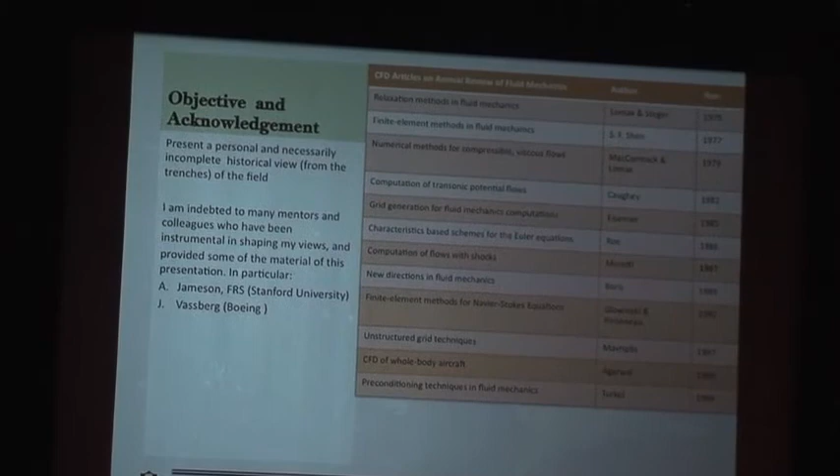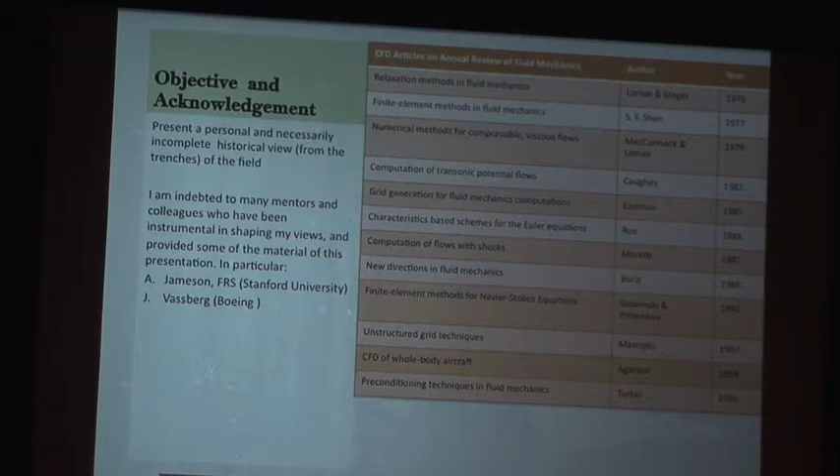So the only thing I can do today is present a personal and necessarily incomplete view of the field from my viewpoint, which for the past 20 years has always been more comfortable from the trenches of development than from the top. And of course, I'm indebted to many mentors and colleagues that have contributed to my development and provided some of the materials in this talk, in particular Anthony Jameson and John Vassberg, with whom I collaborated regularly in the past years.

So why do we talk about aerodynamics as a special field? Well, because the problem of aerodynamics is a little bit particular. The needs, like in other disciplines, depend on what you're looking for in your simulation. But as you well know, in aeronautics we can use a hierarchy of flow models and get some very useful information from simple scalar models such as the potential equation.

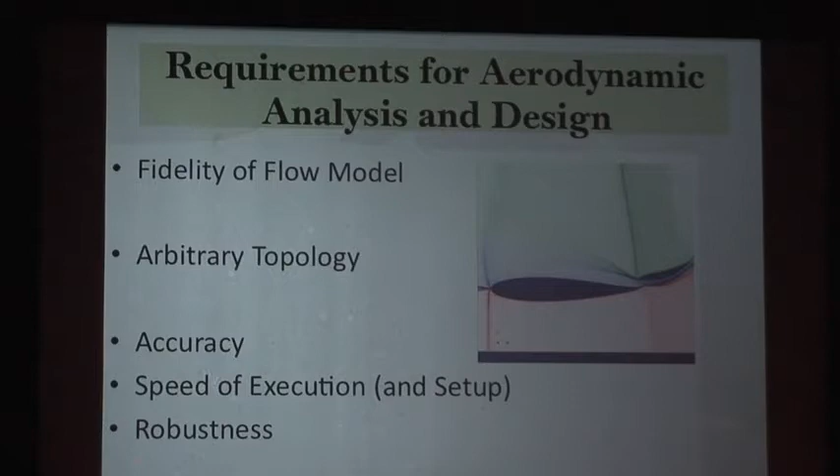And if it has to be useful in a design environment, you pay a lot of attention to speed of execution and setup times, which basically means how you set up the geometry meshing over this complex configuration. And you want to make sure that your implementation in software is robust in such a way that when you change parameters, you can anticipate in many respects what's going to happen. You don't want to have surprises.

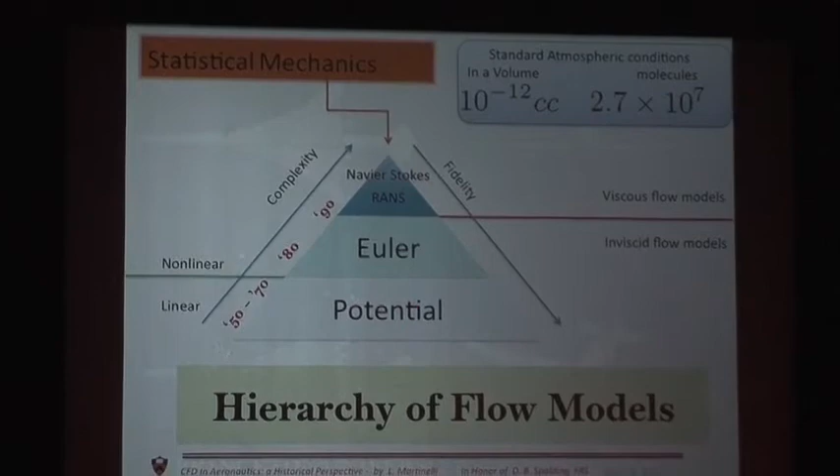So as I mentioned before, one of the things that distinguishes aerodynamics from other fields in CFD is the fact that we could actually get a lot of useful information from simplified linear or nonlinear models using the potential equation. And I put here on the left side of this pyramid roughly the decades that have been dealing with this particular mathematical model.

The beginning in the 50s and the 70s was all dedicated to trying to solve the potential equation, which by this morning's definition is not really CFD, but it was very useful in actually designing better airplanes. I personally would suggest that in this field we start traditional CFD when we deal with nonlinear problems. So the nonlinear potential equation, although it's a scalar equation, is a problem that cannot be solved by other means but numerical calculation.

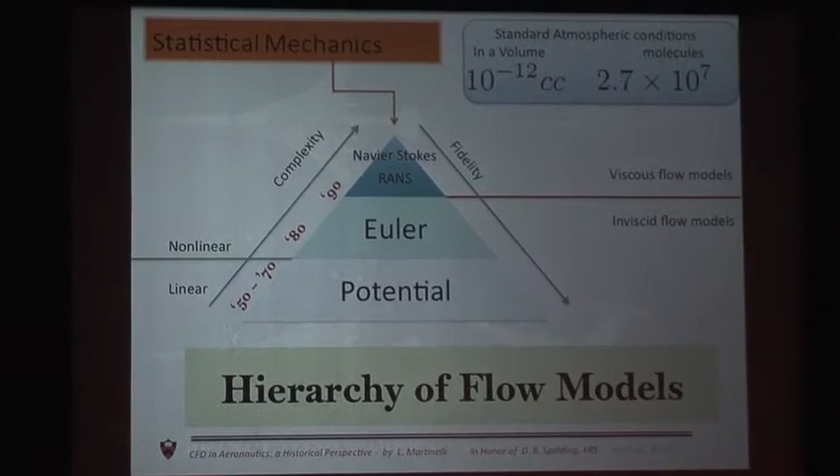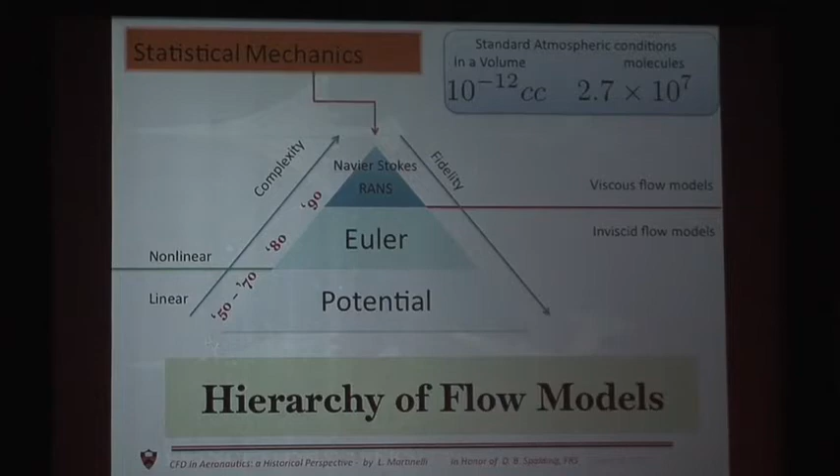So if you want to draw some initial points for truly CFD in this area, most probably the nonlinear potential equation, the full potential equation, is the place to put it. And in the 90s, and more recently with advanced computational methods, we are routinely now solving the Reynolds-Averaged Navier-Stokes equations over complete configurations.

And again, we are mostly concerned, as is well known, with three flow regimes, in which, if you look simply at the flow phenomenology and the characteristics of the potential equation, the potential is either elliptic, or mixed type in the transonic regime, or hyperbolic in the supersonic regime. So we are really interested potentially in developing numerical algorithms for all three possible kinds of PDEs.

So the first one, mentioned earlier this morning, is panel methods, which is a boundary method to solve basically the Laplace equation over complete configurations. It is interesting because it was actually developed mainly within industry. The first report by Hess and Smith at Douglas Aircraft is actually in 1962, and the effort by Paul Rubbert at Boeing started in 1964.

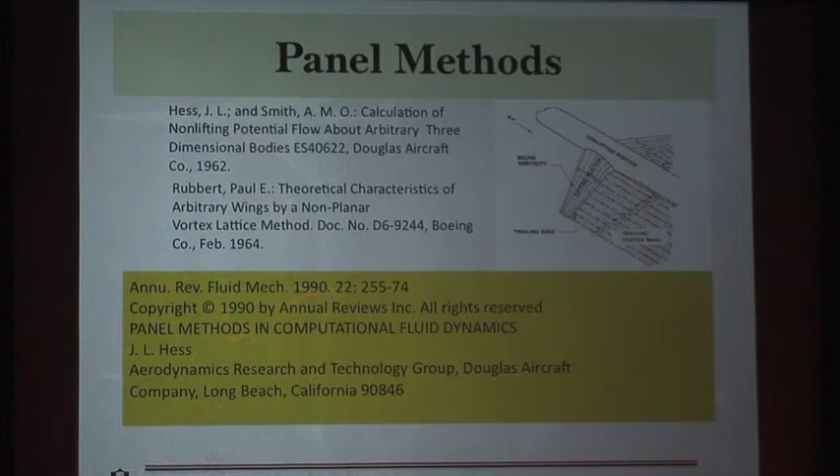And this is actually the internal report that described the first successful methods, at least in the United States, of solving the potential equation by using boundary methods. I'm not going to talk about panel methods, but I just want to point out that there is a very comprehensive and very well written review in the Annual Review of Fluid Mechanics by Hess in about 1990. So, sorry.

Really, I would say that for us, hardcore CFD was actually born with trying to solve the potential equation for flow in the transonic regime. That's what I call the transonic regime challenge, starting from 1956. It is well known that transonic flows are of interest, because that's where you want to cruise most efficiently, and also that's where even a supersonic jet will maneuver.

You know that from a mathematical point of view, they're very, very tough indeed, and if there are shock-free solutions, they're actually isolated points. What does it mean? It means that even if you can find a solution that has no shocks in the transonic regime, a supercritical airfoil if you like, then every single perturbation, either in the geometry or in the flow field characteristics, will move you away from that shock-free solution. That's a theorem that Cathleen Morawetz proved in '56, and it highlights the challenges and difficulties of this particular regime.

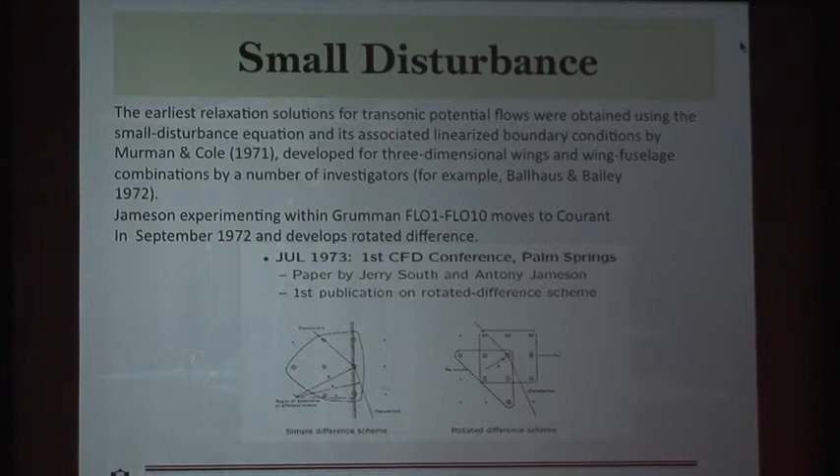The first attempts were actually in the early 70s, and the main actors were Earll Murman and Julian Cole, who in January 1970, at the AIAA meeting in New York City, presented the first really viable solution of the small disturbance equation in transonic flows with the associated linearized boundary condition. And there was also a paper by Yoshihara at the same meeting, and that's basically what caught the interest of industry in CFD at that level.

And at the same time, Tony was back then in Grumman, and after being excited about what he had seen in the meeting in New York, he started coding his own methods, most probably on his own time. And really the first results that solved one of the major problems of the mixed type, so basically having the right region of influence for your numerical schemes, was published in 1973 at the first CFD conference

in Palm Springs, in a paper by Jerry South and Tony that is actually the first publication of the rotated difference schemes. The difference schemes allow you to upwind automatically in the supersonic region and maintain the proper region of influence in the subsonic part. So at the beginning of the 70s that problem was solved, but people were convinced, rightfully so, that they needed to move to solve the full potential equation.

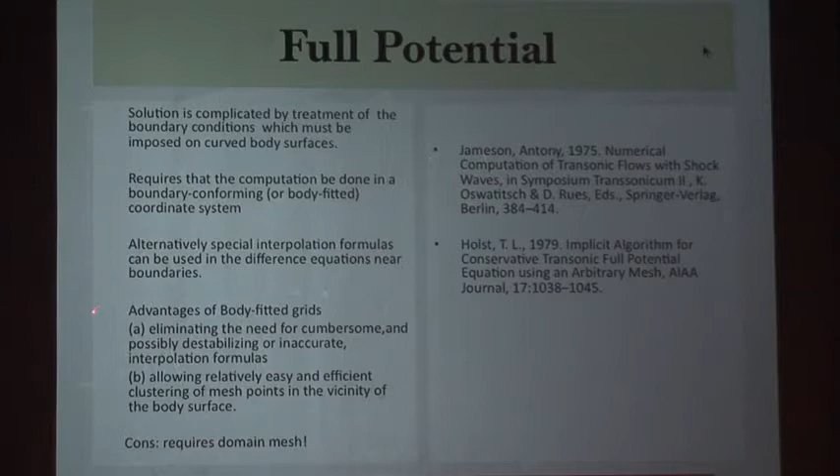And the full potential equation is the full nonlinear isentropic picture of the flow. In that flow regime, the solution is complicated by the fact that the boundary condition cannot be linearized anymore, and therefore it needs to be enforced on the curved boundary. And remember what I said before: the boundary has to be represented fairly accurately, because the flow solution is going to be extremely sensitive to the accuracy of the boundary itself. And so that basically forced, or encouraged, the use of body-fitted grids for the first time.

The other alternative would have been using interpolation formulas, but the field went on using body-fitted grids, which eliminate the need for destabilizing interpolation formulas. The cons: they require a domain mesh. And so the entire field of gridding, of developing body-fitted coordinates in 3D, opened up as a result of that. But for simple geometry, such as a three-dimensional wing, you can use conformal mapping and generate a very good quasi-orthogonal grid that will do the job without being too involved with the mesh generation.

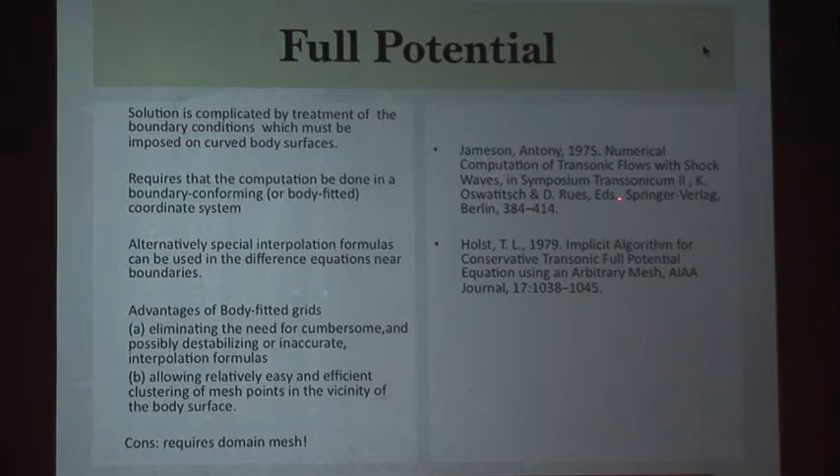And for the full potential equation, the two publications that really stand out are, in the second Transonic symposium, which I think was not in Berlin but in Göttingen, Tony's paper on his approach to full potential. And for implicit algorithms, Terry Holst has a very good and influential paper a little bit later in 1979.

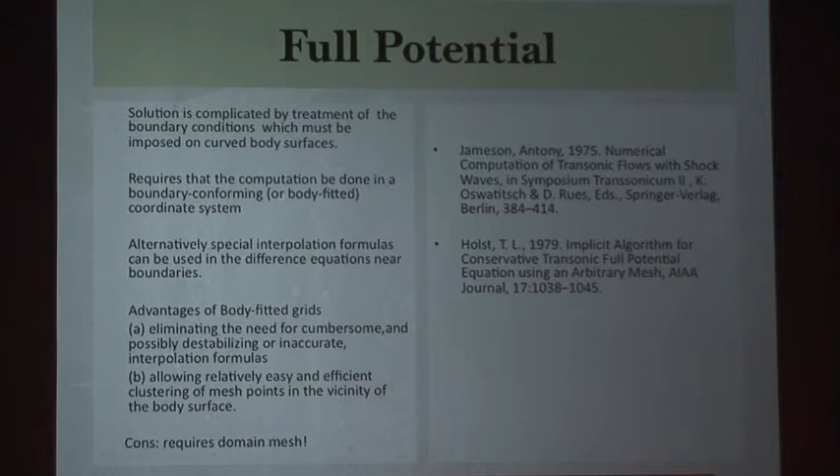So let me talk a little bit more about what has been a game changer in the field, and that's the computer code that implements the 1975 algorithms. It was really a game changer because it demonstrated, as we will see in a second, that computational fluid dynamics was a useful tool in airplane design.

I'm not going to go through these tidbits on how FLO22 came to be, but the important point is that coding started in about 1974, and it sat in boxes in Tony's office for a few months, and back then there were boxes of cards. For those of you that are young, most probably you've never seen that. They were physical ASCII cards, painfully typed on one of these punchers, and whenever you gave the box of cards to the operator, you almost had a heart attack because sometimes they would be jammed in the machine and you had to start all over again. So that was the computing back then.

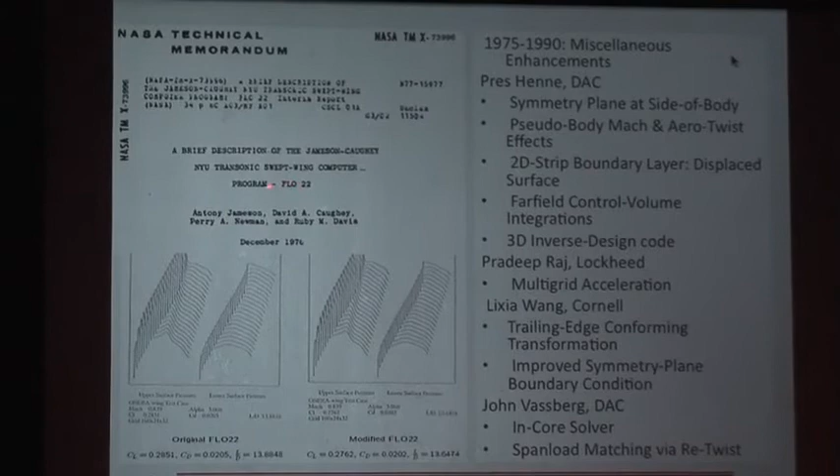These two boxes of cards sat in Tony's office for a while until David Caughey of Cornell came into the picture. Back then Caughey was at Douglas Aircraft. After he moved to Cornell, he got a copy of FLO22 and had it running on the Cornell machine in a couple of weeks. David is a very good programmer. And that changed the game, because the program was published and went around the world in this 1976 NASA report.

And it produces, basically, this typical pressure distribution on a wing, including a weak shock. This is the lambda shock on the top surface. This is the bottom surface, over a three-dimensional wing. As you can see, there were a few bugs at the beginning in the 76 paper, but when all these little bugs were worked out, the pressure distribution was not that different, and the CL prediction and the CD prediction were agreeing within about 1% of each other.

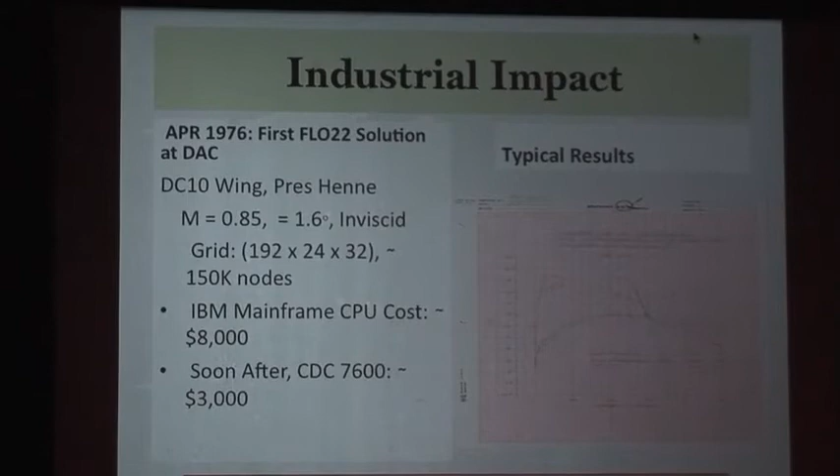But a lot of people in the industry contributed to the development of FLO22. From 75 to 90, there were enhancements at Douglas Aircraft by Pres Henne, Pradeep Raj; Lockheed added the multigrid acceleration. At Cornell, they improved the transformation at the trailing edge, and that is reflected in this better pressure distribution right there. And John at Douglas Aircraft implemented the in-core solver. So it had a real industrial impact.

In April '76, they were the first FLO22 solution at Douglas Aircraft on the DC-10 wing. This is the amount of plotting, automatic plotting, that was available back then. And this one was the pressure distribution, the continuous line from experimental data, and this one was actually the prediction of FLO22.

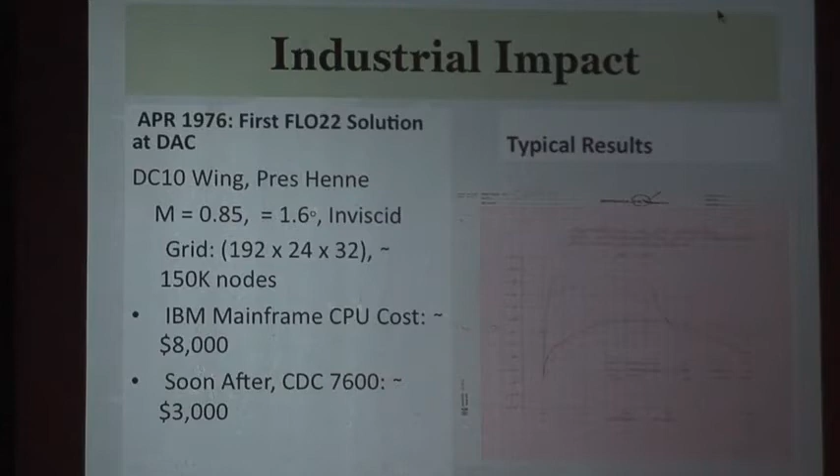And the result was clearly an inviscid potential obtained on a fairly fine mesh, about 150,000 nodes. And the computational cost for one calculation of this type on the IBM mainframe was about $8,000, and soon after was $3,000, which was peanuts with respect to what the impact was on the Douglas development back then. And it's still used.

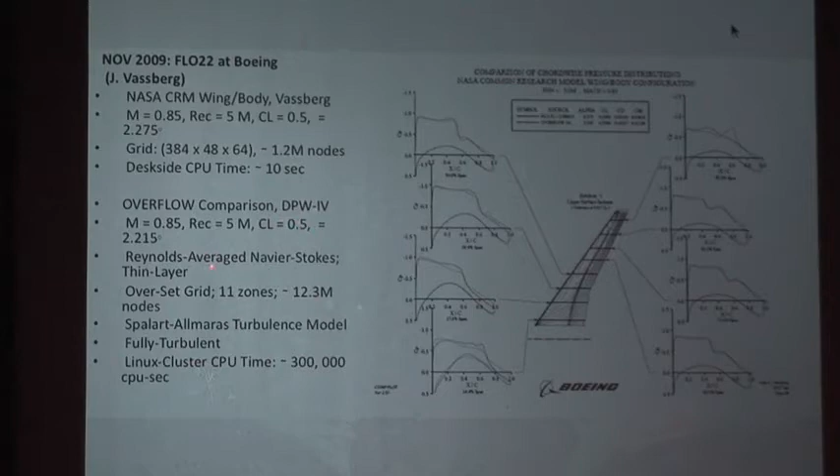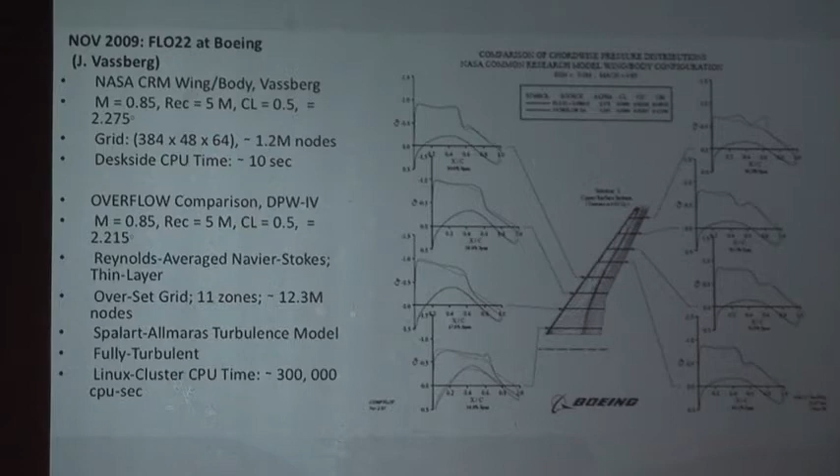with overset grid methods and requires about 12 million points, and it takes about 300,000 CPU seconds on a Linux cluster these days, and still FLO22 with a boundary layer correction gives a similar prediction in about 10 seconds on a desktop computer. So it's still a useful tool. In industry right now, codes of this sort have taken their own rightful place, but still this very old code is very useful to the aerodynamic designer to actually do a quick study.

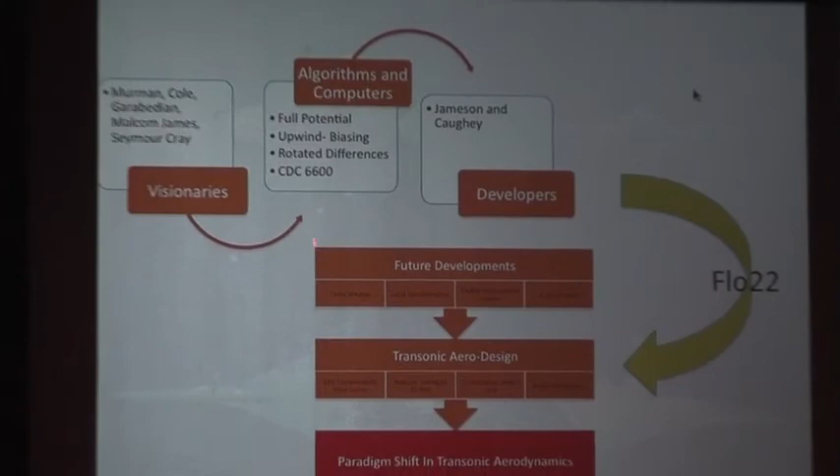So why do I spend so much time on this? It's because it really was a game changer, and I want to depict what it actually took to change the field in aeronautics. It takes visionaries and people in many respects. The pioneering work of Murman, Cole, the influence of Paul Garabedian and his group at NYU that were heavily involved in the development of the supercritical airfoil. You needed new computer hardware. You needed algorithms and computers, and you needed a developer.

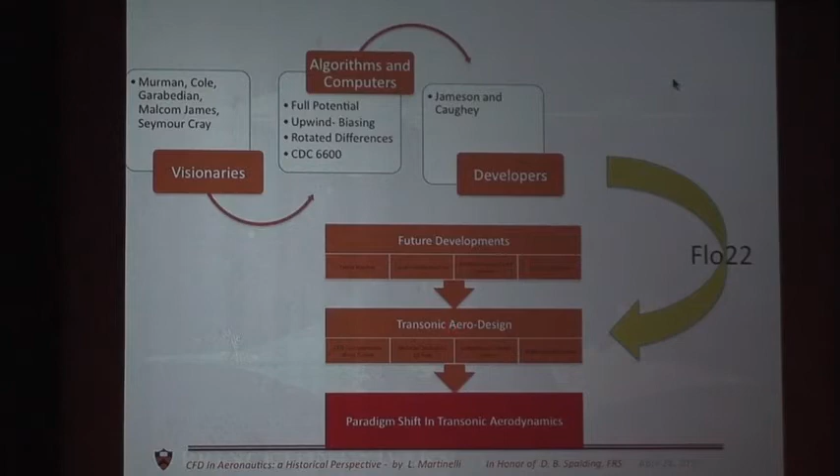If you think back on the Gear book preface, that's exactly what it takes. There was a need, you needed to compute that, and a lot of things have to line up. And that's what happened. The net result for FLO22 was really a game changer and a paradigm shift in transonic aerodynamics in industry. It opened up future development on application of finite volume, both for the potential equation and later on to the Euler equations, and really enabled transonic aero design to be carried out pretty routinely in the industry. So,

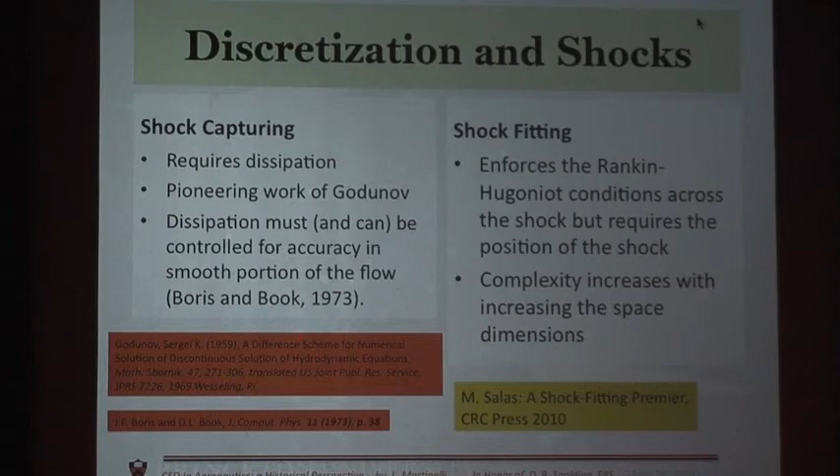So throughout the years, there are a lot of techniques and approaches that have been developed. The most popular ones are the MUSCL approach, Van Leer in 1979, and the TVD approach by Harten in '83, which has been, in many respects, reworked, extended and reformulated as local extremum diminishing schemes by Jameson. And the only difference between these two approaches is that they behave a little bit differently on unstructured meshes and in picking up ridges on a purely unstructured mesh.

And then, of course, the essentially non-oscillatory schemes by Stanley Osher and his students and co-workers. So these are the key references, I think, that correspond to the construction of numerical algorithms for scalar conservation laws.

And then there is also the other problem: once you know that your numerical scheme is actually non-oscillatory and captures shocks for scalar conservation laws, you want to apply that to the flow equations, which are a system. And that actually opens up the choices on flux splitting. The flux splittings that have been successfully developed and used in the field are due to Steger and Warming. There is, of course, the characteristic variable work, which is most probably the most used at this point, by Roe.

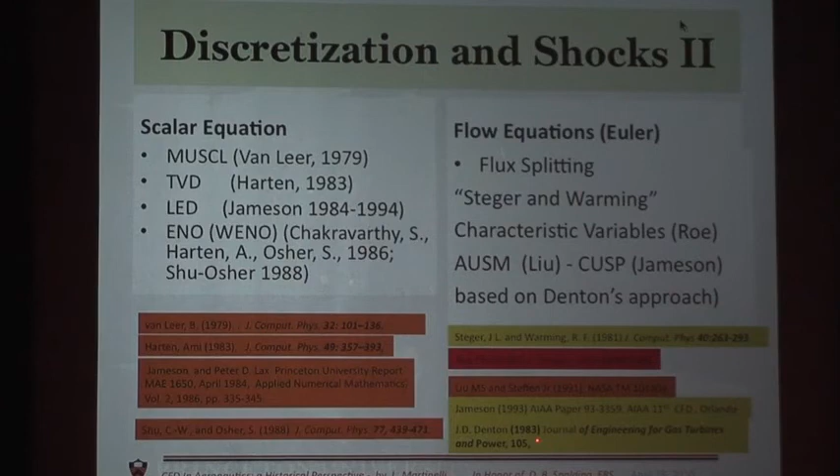And there are two approaches, AUSM and CUSP, which are very robust in practical application. Liou was at NASA Glenn, and Tony was at Princeton when we developed CUSP. And CUSP really is a reworking of something that was proposed and used by Denton in England for a long time, actually. The paper by Denton is '83.

And so we have this discretization, and the next thing that you have to do is actually figure out how to integrate this flow solver, if you're interested in steady state. Most flow solvers are going to be based on a time evolution. So you're going to write down your system of conservation laws in a semi-discrete form, in which you lump together all the flux balances, both convective and eventually diffusive, in this term R. And then you're trying to march these semi-discrete schemes to a steady state. All right? And here, again, you have certain choices that people have made and investigated.

Clearly, if you don't want to destroy the parallelism that is inherent in any fluid flow, the simplest thing to do is actually having an explicit scheme. And you have all the family of Lax-Wendroff schemes, which are very efficient methods for solving and advancing in time.

But if you use them for solving to a steady state, then you know that there is a term in the Lax-Wendroff scheme that depends on delta t, in your dissipative terms, and so basically your steady state will depend on the choice of the time step, and this led to the development of multi-stage time stepping schemes, which are one of the accepted ways of advancing in time.

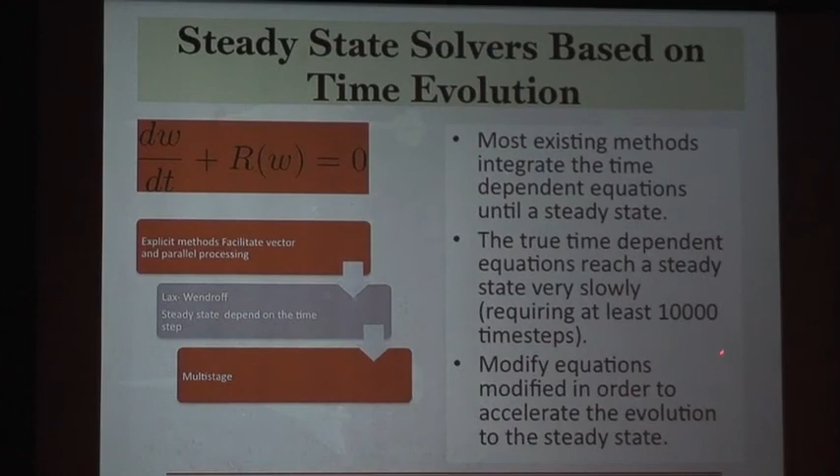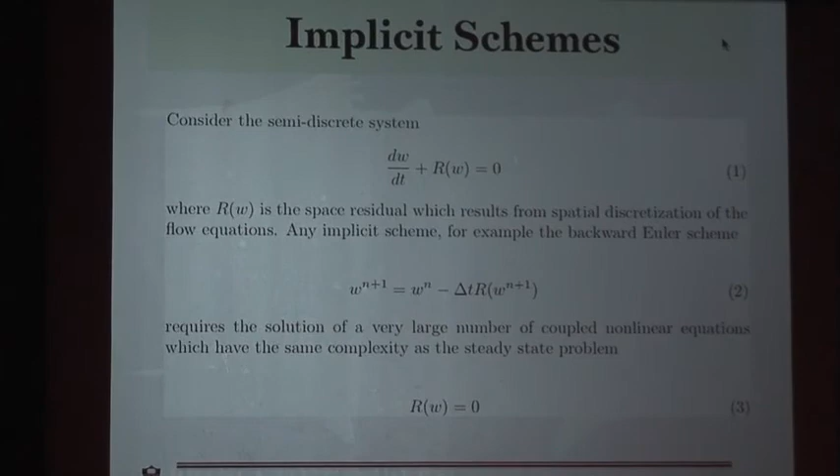The problem with explicit schemes is the fact that they're fairly slow. All of them require a lot of time steps to reach a steady state. And so one thinks about, what about implicit schemes? Well, an implicit scheme has its own problem. Because even if you discretize this equation by an implicit scheme, by backward Euler, for example, in time, you should compute your residual, or basically your fluxes, at time level n+1.

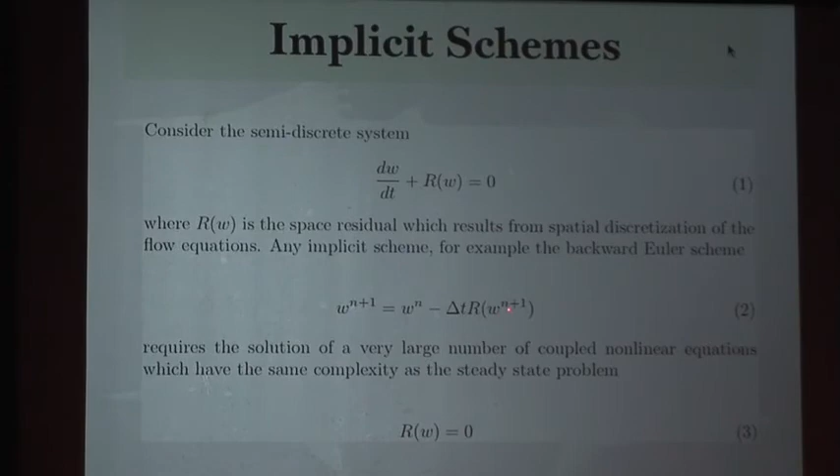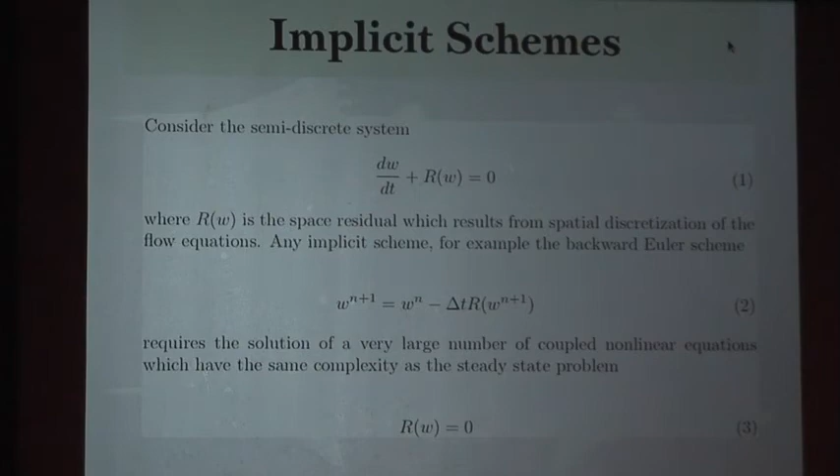Well, these fluxes are actually nonlinear. So solving this particular equation requires some sort of iteration, right? Because it's a nonlinear set of algebraic equations. And so you come back to this paradox, right?

The time evolution method to find a steady state is an implicit method. Suppose that you want to do that; an implicit method, which allows a larger time step, would be preferable. But the implementation of an effective implicit method requires a fast steady-state solver. So accordingly, a fast steady-state solver is an essential building block for an implicit scheme. And that's basically the paradox that is there in every single implicit scheme for nonlinear equations.

And that's basically what forced our group in particular, and many others, to look at ways of developing numerical methods that actually accelerate to the steady state. And this brings us to the development and use of the multigrid technique in our field. Fedorenko was the first one to actually propose multigrid in '64, Achi Brandt in '77. Ni in our field, at United Technologies, brought multigrid to the Euler equations,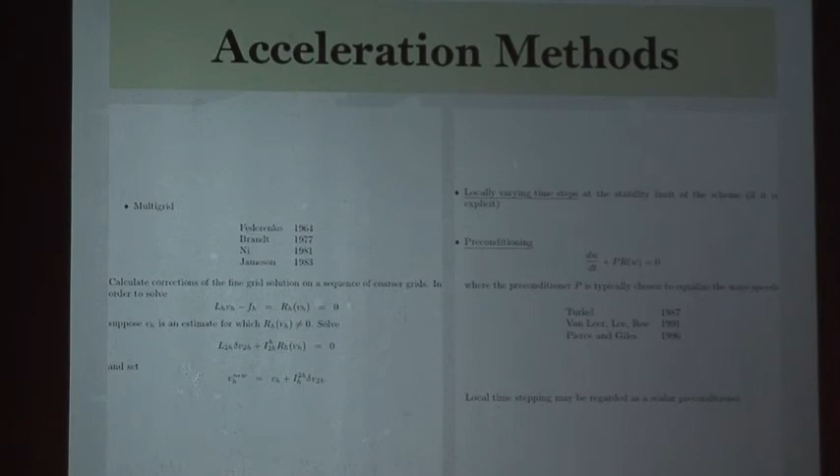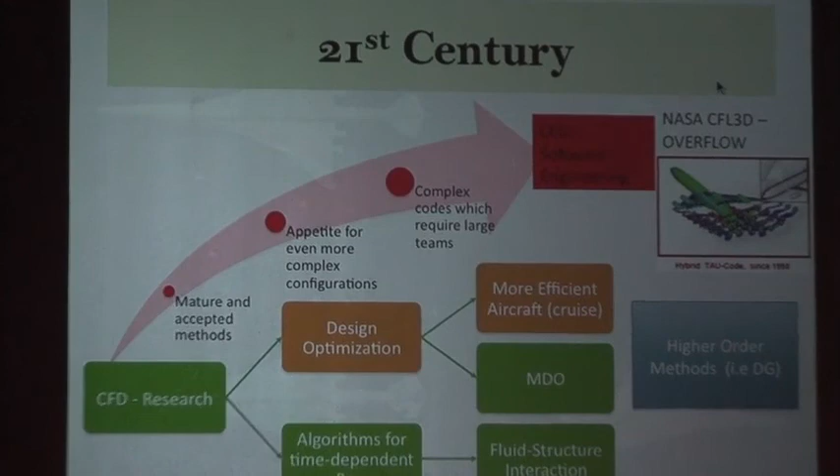and it became part of our family of schemes. So I'm running out of time, but I just wanted to give you a very quick view of how the field developed, and why, in many respects, it developed this way. So let me jump forward in time, and basically tell you a little bit about where the field is right now.

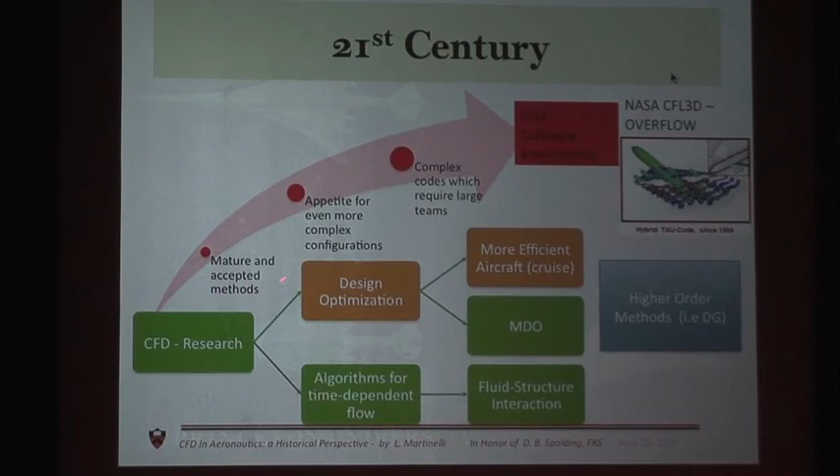So right now, I think it's fairly reasonable to say that CFD is a mature and accepted technology. We have developed numerical methods that allow you to solve really complex flows, at least from the Reynolds-averaged point of view, very quickly. And that has really brought the appetite for even more complex configurations. So you really want to do full configurations of aircraft, rotating blades, and so on and so forth, which basically forces you into implementing complex codes which require large teams. So we are almost in a situation in which designing a better wing takes fewer people than actually maintaining one of these codes.

So basically, along this line of development, CFD has become mostly a software engineering problem. And the codes that are actually in use are necessarily developed by bigger organizations. There is CFL3D from NASA, there is Overflow. One is Thomas and Rumsey. Overflow is Pieter Buning and Jespersen, and its reincarnations, and embedded ARC2D and ARC3D of Steger and Pulliam, and all the experience at NASA Ames. And in Europe, you have things like the Tau code that is at DLR.

And so basically, the new direction of research that has been followed in the late 90s and today is actually toward trying to use, and we are successful in using, CFD as an inner loop for optimizing the shape of an entire wing-body configuration, and we are able to get more efficient aircraft in cruise condition pretty automatically. Multidisciplinary optimization is the area in which you're basically trying to link the fluid mechanics to structural constraints and other mission constraints. And in CFD research, the field has really moved toward research on time-dependent algorithms and pushing more high-fidelity fluid-structure interaction problems.

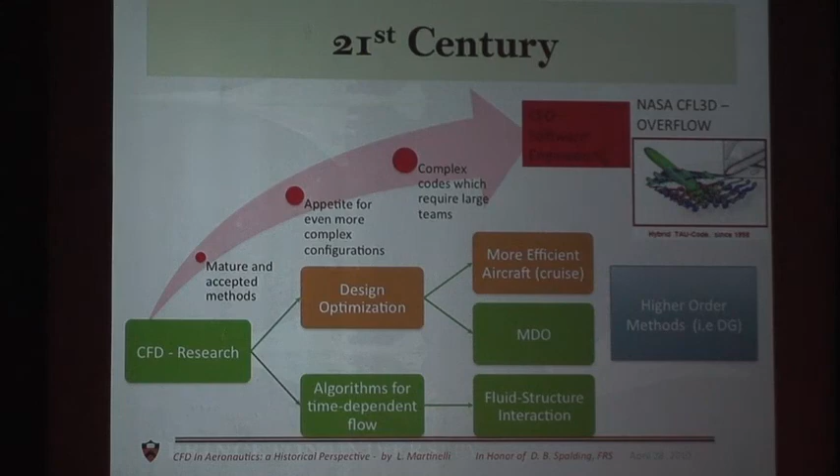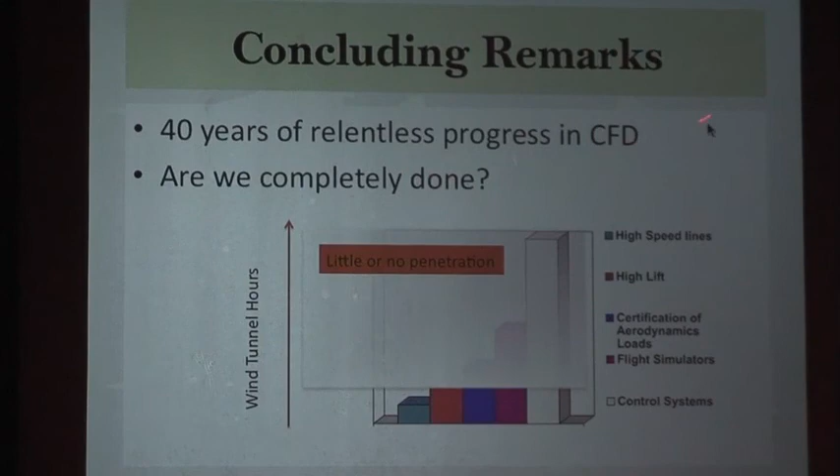And in concluding, I can say that our field has been driven by 40 years of relentless progress in CFD, really, for the compressible Reynolds-averaged Navier-Stokes equations. And the question is, therefore, are we completely done in this field? It's a mature field. If you look at it from an industrial point of view, in a cartoon manner, and if you map on the vertical axis the wind tunnel hours that are spent in some part of the design, you're going to find out that the high-speed lines, which is basically the cruise condition, the problem that we are able to tackle and solve routinely right now at a very high level of fidelity, is only a small portion of the problem.

And CFD has had little or no penetration in high-lift design, and basically in certification for aerodynamic loads. This is still done by wind tunnel and flight test, flight simulators, especially for the design of the control system. So this, if you think about it, is an area in which you need high accuracy, you need fast turnaround time, and you need unsteady and possibly aeroelastic coupling. And that's basically where the field and the leading-edge research are.